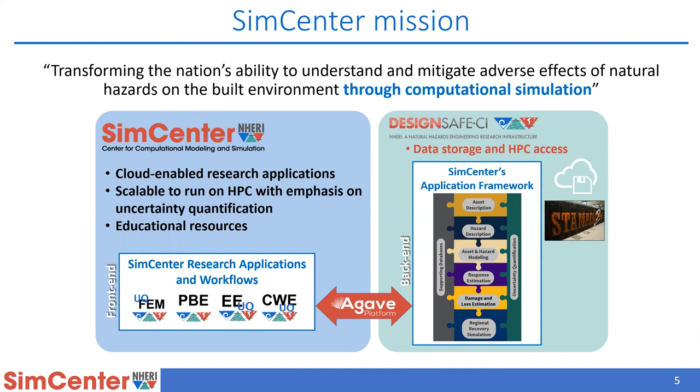So these 4 are our research applications, and one of them is PBE that I am going to talk about today. PBE is really just a facade, a front end that provides you access to this workflow that we built and the potential to run complex simulations on high-performance computing clusters in the cloud. Besides these applications, we have some other tools that we develop, as I will show you later. But the main purpose of our existence is to create these applications and make it easy for the research community to run complex calculations on supercomputers.

These are the three main products that we develop. I call them products, but that doesn't mean that they cost money. These are all free. The application framework, as I mentioned, is the most important thing that we are working on. We have this jigsaw here because we imagine this application framework as a system of interconnected applications that can talk to each other through the interfaces that we develop between them. And this allows you to design various workflows in a very modular fashion.

So if we put together a workflow and there is an application that you don't like, you can create your own jigsaw piece and you plug it in there, say for response estimation. We use OpenSees now, but if you don't like OpenSees, you want to use something else, you can wrap it in your own code and plug it in there. And then you can keep working within a familiar environment and have access to all the other tools that are available in our framework.

And besides these applications, we also pay a lot of attention to the data that supports them and making sure that you can connect to those databases that are available for the research community. And uncertainty quantification is in every step. So this is it in a nutshell. And when we have such an application framework, we can create various workflows.

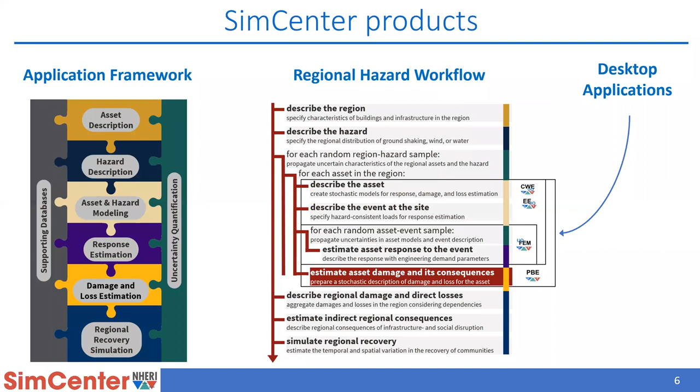And one of them is PBE here, which what it really does is it takes a piece of the workflow out. So you can see that it's kind of this middle piece, and then it makes it much easier for you to access it and use it and get used to it. And then once you get familiar with it, you can probably leave the user interface and the desktop application behind and start using the full workflow. But this is a very nice learning process, and it allows you to get familiar with what we are doing and how these applications and workflows are designed.

So just to give you an example of what applications and what different puzzle pieces can go together, here is an earthquake simulation workflow with 3 different types of fidelity. So in one case, you can think about HAZUS style loss assessment and the corresponding very simple modeling of the structural response. And if you don't like that, you can simply switch this piece and you can have a high fidelity model and a FEMA P58 style, more detailed loss assessment.

Similarly, on the hazard side, you can start with a seismic hazard analysis, but you can also have a physics-based seismic wave propagation calculation, and then you have the ground motions from there. So this one is a probabilistic procedure based on historical data, and this one is more physics-based, based on the understanding of the soil conditions around the site. And we could continue with different other options.

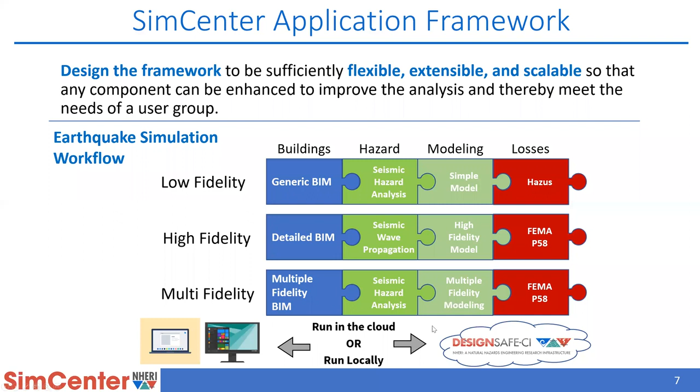So this is how we imagine having multiple choices available for the researchers so that you can put together the workflow that fits your needs and your particular objectives. And whatever you put together, we pay very much attention to make sure that you can run it locally so that you don't necessarily have to share your early results or your first pieces of code or new developments. But then you can also run it in the cloud through DesignSafe without making any changes to your code or your input files. So once it runs locally, it will run on DesignSafe too. And we think this is quite powerful.

Two examples of the workflows that we put together and the potential that is already there are demonstrated by the test beds that we have. We have one test bed for the San Francisco Bay Area. You can see an example here with the expected damage from a magnitude 7 earthquake at the Hayward Fault. And we also have another test bed that we put together last November after the earthquake in Alaska, just to show that this approach and having these tools available to you would allow rapid assessment of the damage and the losses after such an event.

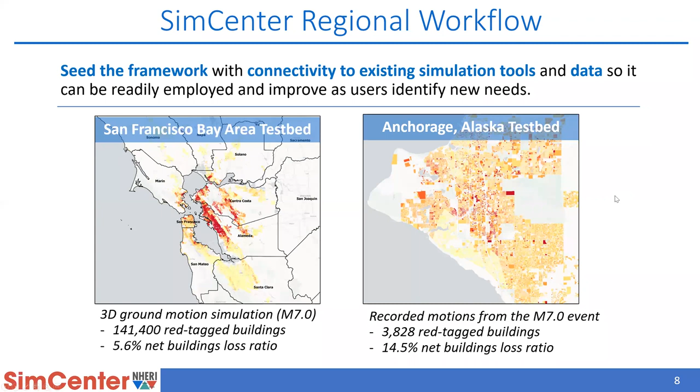And both of these took significantly fewer man-hours to put together than if we had to start from scratch. So if you are interested in earthquake losses in the United States, it's usually quite easy to get the data that is required, building information, for example, and then you can do a similar kind of assessment within a reasonable amount of time.

After the workflows, let's see a little bit about the applications, the other applications besides PBE. So PBE is here. We build research and educational applications as well. So I already talked about the research applications that are basically parts of this larger regional workflow, and then we put a facade in front of that calculation backend so that you can access it easily.

We have the EEUQ, which was presented last week by Frank McKenna. CWE is more about wind-related calculations, and UQFEM is an application that focuses on uncertainty quantification for finite element modeling. And besides these, so these are for research, and we have 4 applications that are more focused on education. So these are usually simpler applications.

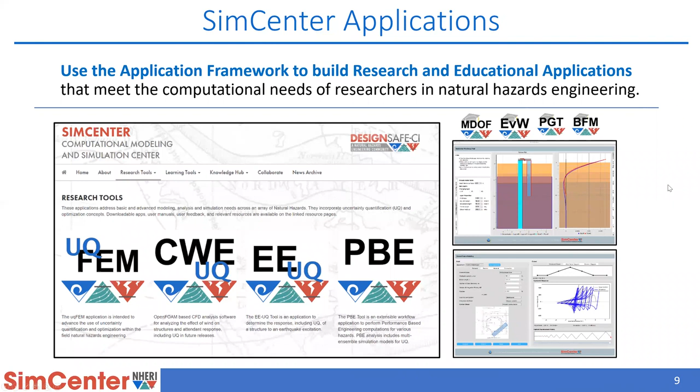They don't use the regional workflow, but they use tools that we identified as interesting or important for students, and we allow them to access those tools and to run some interesting calculations and interesting problems for educational purposes. You can see these applications and you can read more about them at our website. This is a screenshot of our website. You can see the research tools under research tools, and you can see the educational applications under learning tools.

So it's very important to understand that SimCenter very rarely develops applications or tools for a particular purpose. There are exceptions, and I will show some today. But mostly we are searching in the community and trying to identify the tools that are already available. And we just package them, make a jigsaw piece, and then make it available to others so that you all can use the tools that others have already made. And this avoids developing the same thing twice or 3 times as it happened already in the past few decades. So that's enough about SimCenter.

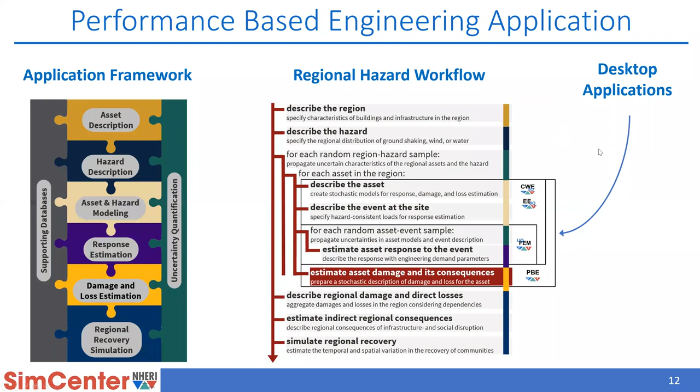But it's important to know that even that workflow uses the same backend for the performance assessment as the PBE application. So if you get familiar with the backend and if you get familiar with the performance assessment in the PBE application, it will be much easier to use our regional workflow later.

So here are a few details about the application. As I mentioned, it's mainly a front end. So it has this front end part, which is really a desktop application. It runs on 3 different platforms. It runs on Macintosh, it runs on Unix and on Windows platforms. And it provides this convenient user interface to this part of the workflow, this script of the workflow.

And you might notice that everything except this red part is actually something you already heard about if you were there last week at the EEUQ webinar, because this is just a response estimation considering uncertainty in the event and uncertainty about the characteristics of the building. So that is covered by EEUQ. And then what PBE does is it extends the EEUQ backend so that you can assess the losses given the response of the building to a seismic event.

And the desktop application part, so what you will see in today's webinar, is a front end that prepares an input file for this backend that does the calculation. Now, one consequence of this is that once you are very familiar with how that input file looks, you will be able to create that input file yourself using your own, I don't know, MATLAB code or Python code or whatever you use for your own research.

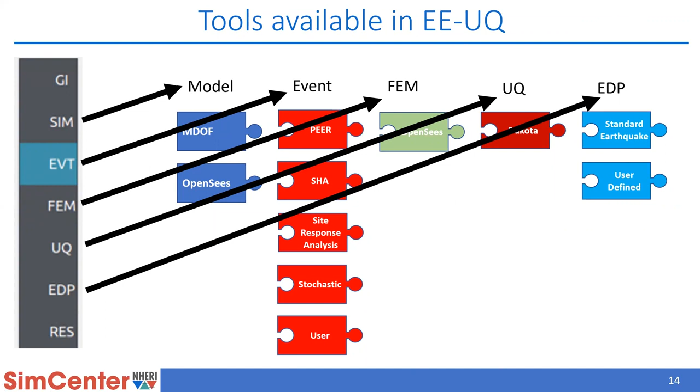Now, I will have a slide that shows something that Frank showed last week for the EEUQ. So as you can see, all of these options are available in EEUQ for the different puzzle pieces in the workflow. So you have different ways to model the structure, many different options to model the seismic event. We have OpenSees for finite element modeling, and we use Dakota for uncertainty quantification. And then EEUQ provides EDP values in the end. And what we do with the PBE tool is that we pick up from here, and then we use pelicun to calculate the decision variables that describe the losses, and the damage measures that describe the damage in the building.

So one more thing before we start the demo. I really recommend you to read the manual, because it will help you install the environment that is required to run the application. It's not very challenging, but if you don't read the manual, I think you will have a hard time. So it walks you through it, and then it will explain the usage of the tool, every single panel, every single field that you can use to define your problem. And it also has some troubleshooting parts where we try to identify the typical errors and help you to solve those problems.

And if you cannot find a solution for your problem and you are experiencing errors, that could very well be because there are bugs in the software. It would be a lie if I told you that it's a perfect tool. Of course, we have certain issues, and we would be very happy if you told us if you experience problems, because that helps us correct those problems and move forward. So please give us feedback if you experience trouble.

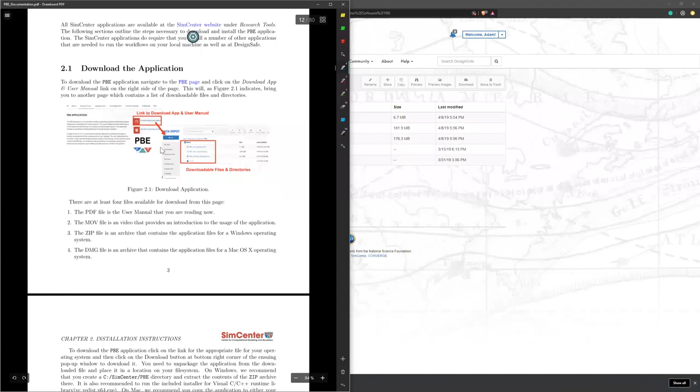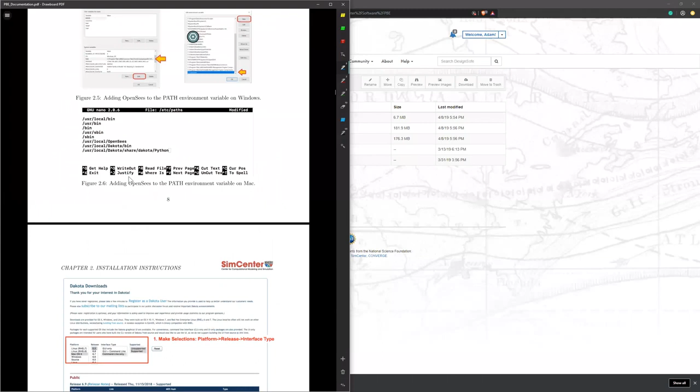We also give you suggestions on how to test your installations. So everything you need to install, you can test, and if the tests don't work, then we can help you to find the problem. So you run these tests, and then you have the application ready, and it should work. And then we also explain how you can test the application itself. So you install the environment, you have Dakota, you have OpenSees, you have all that stuff. And then how can you make sure that you will be able to do a calculation with this PBE application?

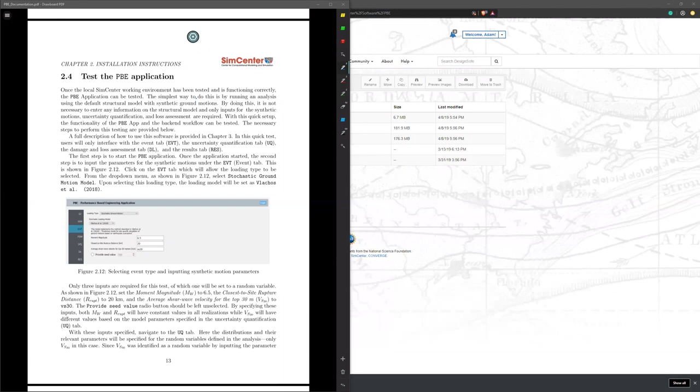And I will start with running that test here, because it's just very quick, and it will allow me to walk you through the interface, and then we will gradually advance to more complex examples from there. So I have just started this application. This is how it will look for you. And seeing the interface doesn't mean that you will be able to do a proper calculation with it. So don't be fooled by that, because as I mentioned, this is just a facade.

It will create an input file. It will give it to the workflow backend. And then if there is a problem with one of the tools that we use, say you don't install OpenSees correctly, then it will only realize that when it tries to run the finite element analysis, right? So seeing this doesn't mean that everything is going to be okay.

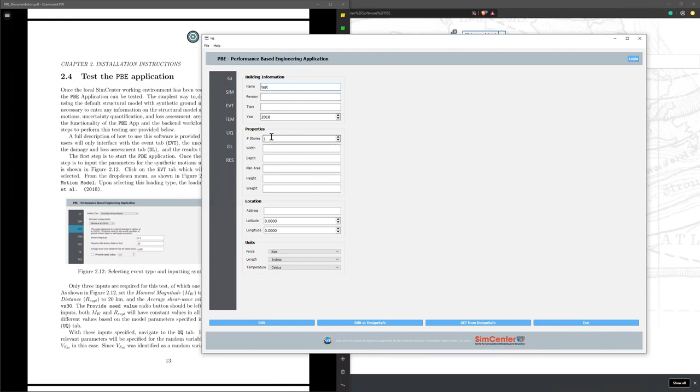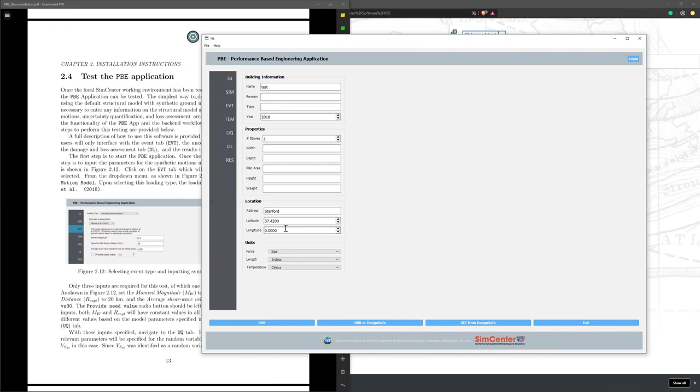Now, as we explain here, you don't need to set a lot of things to put together an analysis really quickly. As you will see, we only need to change a few fields, and then we will be able to run a calculation. So what we do here is we give it a name. This is not necessary, but it's good practice. And then we give it a location. I will use Stanford. So pay attention to the units here. We will keep the US units for now.

And then in the second tab, we could set up a model. We could set up various kinds of models, but we will leave it as it is, and this will give us a nice single degree of freedom system. So we don't need to touch that. And then for the event, instead of loading a ground motion or doing seismic hazard assessment, we just use a stochastic ground motion tool that will generate a time history for us. Frank also explained this last week, so I'm using the same example he used, where it's a 6.5 magnitude event, 20 kilometers from the site, and the VS30, so the soil stiffness, is going to be a random parameter in our calculation.

So this is it. We have an event, and then here we could set some parameters for the analysis, but we are not going to do that now. And we use Latin hypercube sampling. So this is the uncertainty quantification tab. Latin hypercube sampling, 10 samples. And as you can see, it already picked up our random parameter VS30. I'm also following Frank here from last week, so I'm adding 350 for the mean and 25 for the standard deviation of the VS30 normal distribution. It doesn't really matter because we are just running a test now.

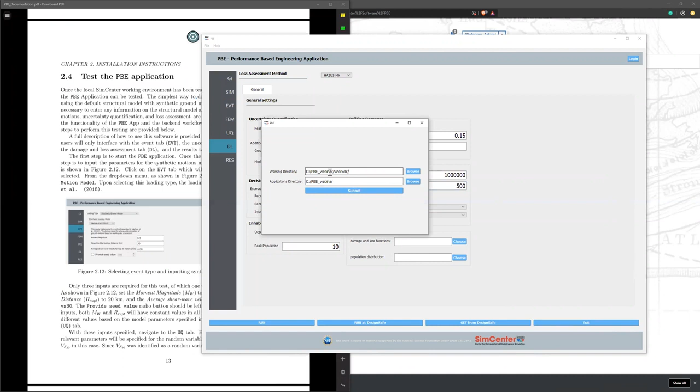So this one is the folder where you put PBE. I just put it in the PBE webinar now. And this one is in your documents folder on your computer. And I will replace this now. You shouldn't do that. I will replace it because I want to show you some of the results, and I want to make sure that they are going to be available. So if you specify a workdir here, it will put all the temporary files in that directory. So I just put it in the same folder where my PBE application is.

And then you click submit, and you can see that it's running the workflow up here. You will always get these messages to know what is happening. And now it's running the damage and loss calculations. And if all goes well, then you see the results. The results are at this RES tab, and there are two tabs within there. The data values, which plots you some of the data. I will go into more details in a second.

And the summary, let me pull this a little bit, that provides you some statistics. So it gives you the mean, the standard deviation, and then a couple of percentiles, so that you have a general understanding of the marginal distributions of the different decision variables and some of the inputs here. So these are, for example, the time of the event. So not all of these things are decision variables. But for HAZUS, you see you have 4 different severities of injury. You have a reconstruction time, a reconstruction cost, and the number of inhabitants. And then you see how they are distributed in this particular meaningless example, because this was just a test, right?

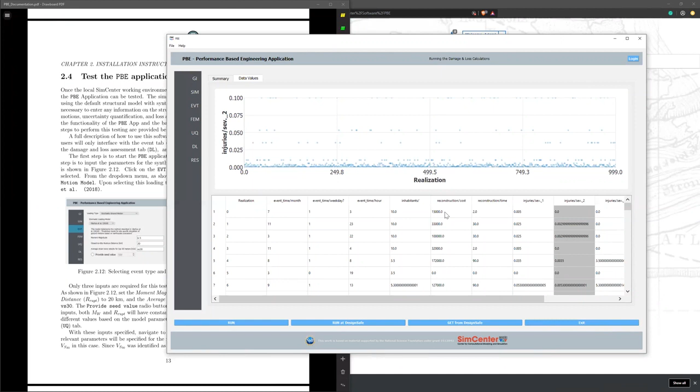For the visualized part, we have a spreadsheet here. Each row is a realization. So you see we have, in this case, 1,000 realizations, and it shows each of those decision variables and inputs. And you can plot them against each other. So you can see the joint distribution. For example, we can plot, let's say, reconstruction cost and reconstruction time.

Just to give you an example, there is this really neat way you can control what you plot by clicking on a column with the left or the right mouse button. So if you click on, let's say, injuries, if I click with the left, injuries are put on the y-axis. If I click with the right, the injuries are put on the x-axis. So you can always plot two things against each other by clicking with either mouse button on them.

Now, another thing you can do is you can click on the same column with the 2 mouse buttons, and then it depends on which one was the last. So if you click with the right mouse button last, then you get a cumulative density function. If you click with the left, then you get a probability density function. So this one gives you a general idea of the marginal distribution of this particular decision variable.

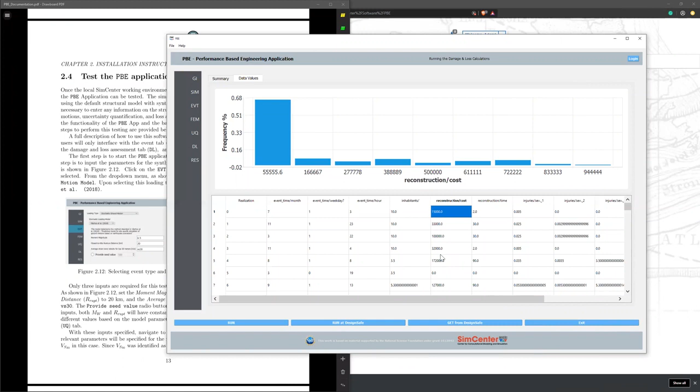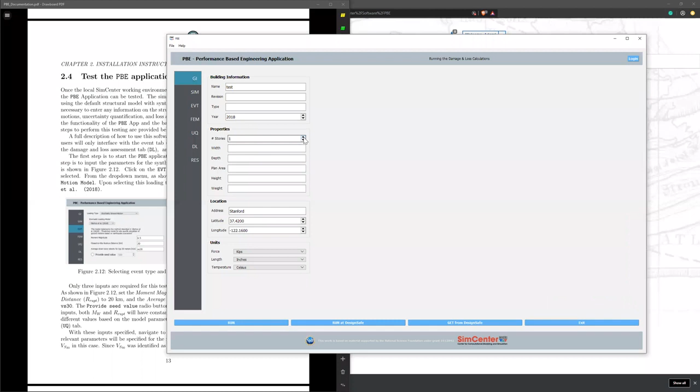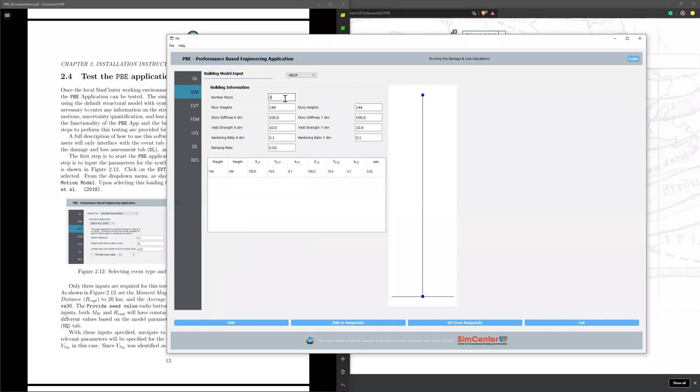All right, so this was interesting to see that the application actually works. But now let's put something together that is more meaningful. So we go back to the beginning and we say that this is going to be a 3-story building. So here we add 2 more stories. This is important for the loss assessment engine, so that it knows how many stories it needs to look at. And then we go to the simulation and increase the number of floors to 3. And as you can see, this is updated. So now we have a multi-degree of freedom system.

And we don't want to simulate a 3-dimensional response. So we will increase the stiffness in this direction quite a bit. And we will add the hardening ratio of 1.0. So that means it's elastic, regardless of what the yield strength is. And I will update this with a couple of meaningful parameters, just to get some response that is interesting in the end. The story stiffness and the yield strength, and that's the last thing I need to change, I believe.

And you can see that if you change these values, it will update all of the stories. So of course you could go and change it story by story. I just want to be quick this time. But if you do that, you can save your work. So it's not like you make a 20-story building and you do all these changes, and then the moment you close the application, you lose all that data. So whenever you feel like you already put a lot of inputs here and you would be sorry if they were lost, you just save what you did in a file and you will be able to load all those later.

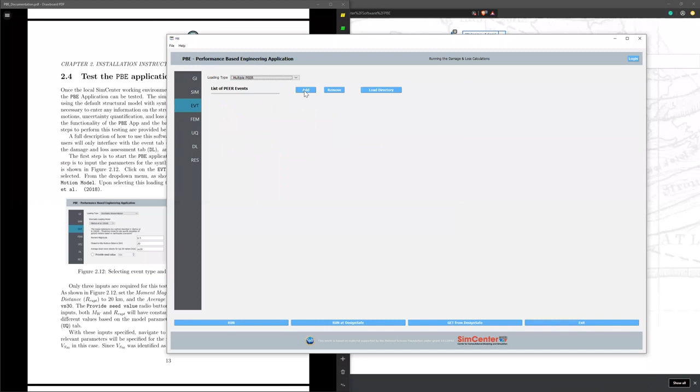So we have stochastic ground motion now, but we would like to change this just so that you see something else. We use a multiple PEER option, which means that you can use ground motions defined in a PEER format. I will add 3 of them now. And I prepared these earlier.

So you go to, oh no, not here, that's coming. So we have events, and then I prepared a couple of ground motions that represent a 10% in 50-year event at Stanford, and I will load 3 of them now. And as you can see, this can be quite cumbersome if you want to load, say, 40 ground motions. So in the next example, I will show you how to do this quicker if you have a large number of ground motions. But for these 3, I think it's doable.

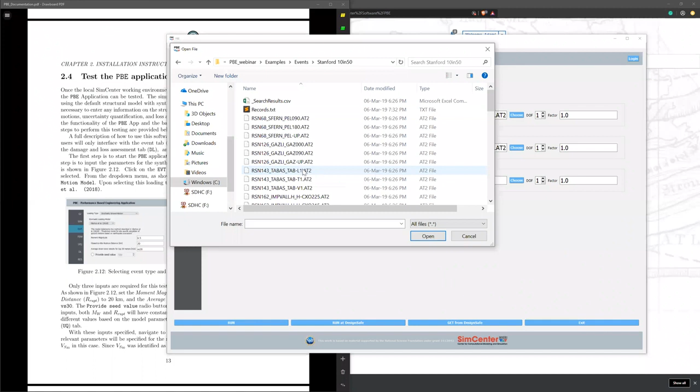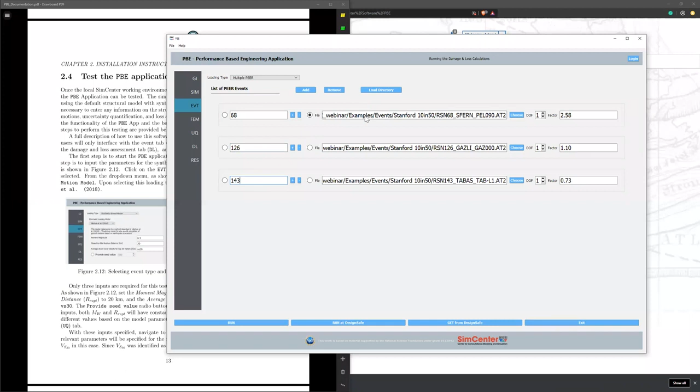So this just shows you how it works when you load the ground motions one by one. So we have 3 of them, and then I will specify the scale factors here, again by hand, but we have a way to do this automatically, as you will see in the next example. And yep, we need to give some names to them. Usually I just use their IDs, so 68, 126, and 143.

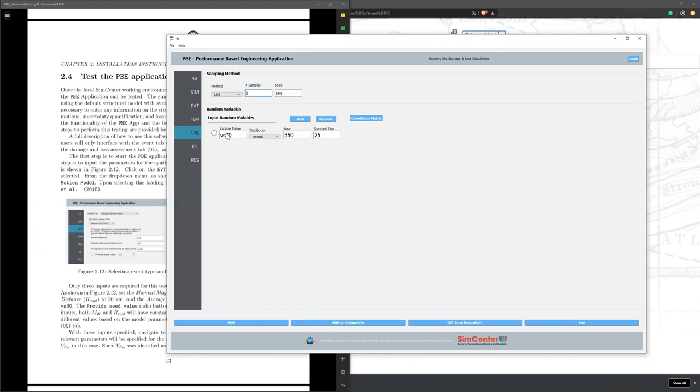Okay, so we have 3 ground motions, and we want to run just regular OpenSees analysis, but we don't need 10 samples, 3 samples is enough. This will make it a bit faster. And we no longer use the stochastic ground motion option, so we can remove this random variable.

Okay, when it comes to the damage and loss, now we can say that we want to add some uncertainty here. Let me go into the details now for every field here. So for HAZUS, we give you the option to add uncertainty to the engineering demand parameters that come from a finite element analysis.

One thing that you need to know about this HAZUS option is that this assumes that you have engineering demand parameters available from an analysis, and it uses the fragility and the loss curves from HAZUS. It does not use the curves that associate intensity measures with damage and losses. So it doesn't use the vulnerability functions, it uses the fragility functions. This is, I think, an important distinction. So it allows you to do a more sophisticated finite element analysis and still use the assembly-based fragility options in HAZUS.

Now, given that we are only using 3 ground motions, I think the 0.2 is still quite bold here for uncertainty, but anyway, we just put some values here. These are added to the logarithmic standard deviation of the engineering demand parameters, so it adds uncertainty to the results. We will simulate 1,000 realizations. Here you could choose between different types of decision variables. If you are not interested in injuries, for example, you could turn it off, and then that will make the calculations a little faster.

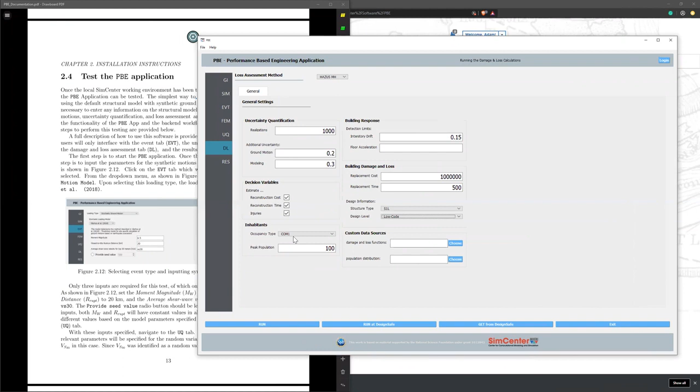And here, this allows you to override the default fragility functions. So HAZUS provides some fragilities, as I mentioned, but if you have your own, you can format them according to the JSON formatting that we defined for HAZUS, and I am very happy to discuss that if you are interested in such things, it's not difficult. And then you can provide that here and override the HAZUS ones and make sure that the calculations are performed according to your fragilities. This is also interesting if you have a particular type of occupancy or structure that is not included in HAZUS and you want to do some calculations for that.

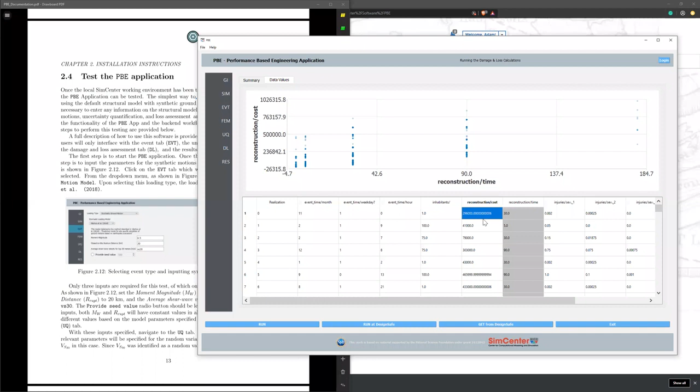Okay, so now we can run the calculation. Again, we can see that the simulation is running, the damage and loss calculations are running, and hopefully we see the results. There you go. So now we have results for a 3-story structure. Reconstruction cost is usually more interesting. And you can see, again, the cumulative distribution function or the PDF. You can plot reconstruction time versus cost, so you can have a general understanding of the data. And again, the summary results are available.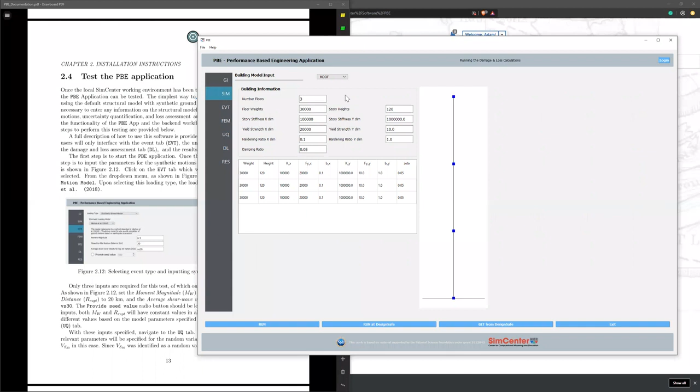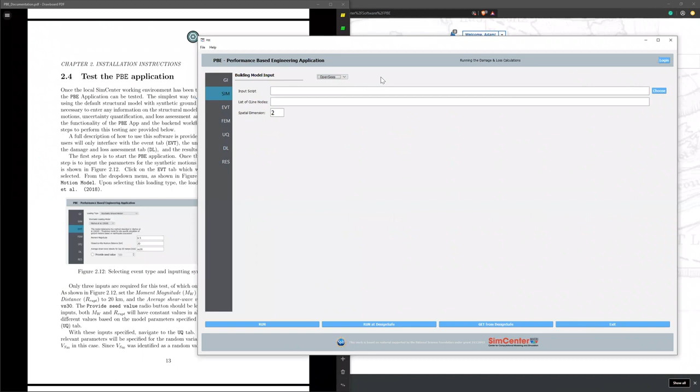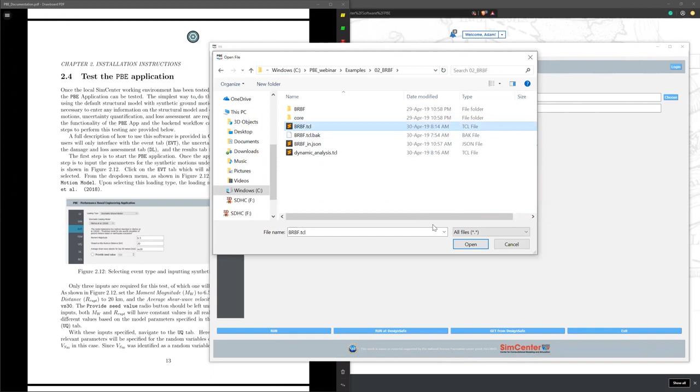Now let me move on to one more example, and that will be the last one, where we are not using this MDOF, but we are using a finite element model that was previously assembled by me, and it could be something that is assembled by you. Many of you probably use OpenSees already, and you have your own models that might be much more sophisticated than an MDOF. And for this case, I will use a BRB, so a buckling restrained braced frame that I developed earlier, and I will show you how this exactly works.

So just really quickly. This is the file that I loaded here. So you see this is the BRBF TCL file. And this code, as you can see, references other TCL files, and it doesn't do much. It builds the model. It doesn't do the analysis. So this is a model file. I will open the model builder for you just to see that this is a pretty complex model. I will just scroll into it just so that you see that there's a lot of things going on here.

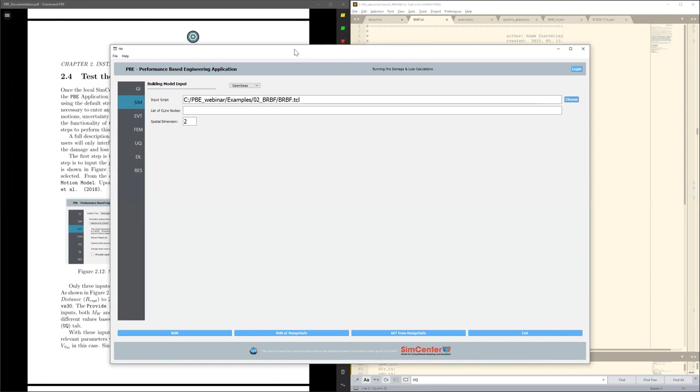So this demonstrates that you can load anything here that is defined in OpenSees and that will run properly in OpenSees. So if you have your own model, but you have not developed a loss assessment tool that could estimate the damage and the losses to that particular building that you modeled, you can use our tool to load your model, do the analysis that you have been doing, and then extend it with a loss assessment step.

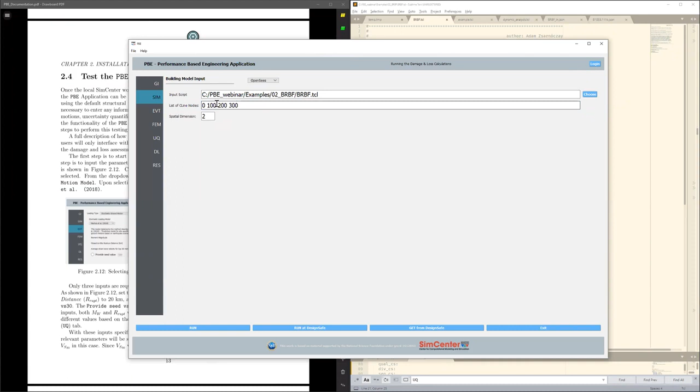One thing that you need to specify, and I think Frank also talked about this last week, is the column line. So this is a 3-story BRBF, so we have 4 points here because we need everything from the ground all the way to the top of the building. And because now we are going to use FEMA P58, we have to go here and specify a plan area. And I'm sorry, but I'm from Europe, so we are going to use standard units now. So we are using meters. This means it's 500 square meters. That's the plan area. And it's still a 3-story building.

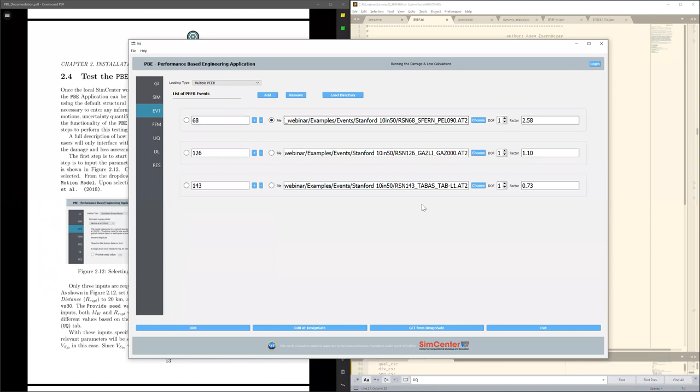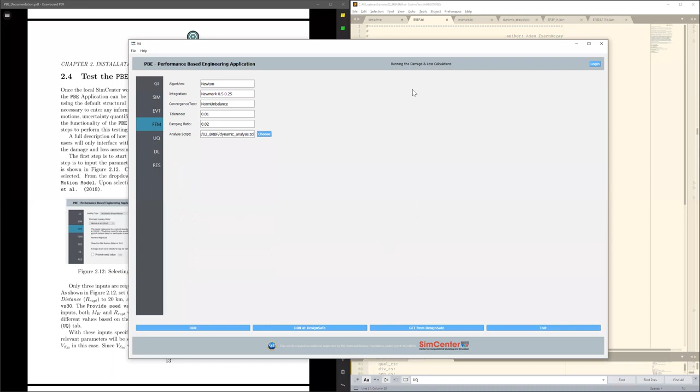And although this was designed for Istanbul, we will put it in Stanford for now. We use the same 3 ground motions. I'm not going to change that. But for the analysis, these settings will make it very hard for the model to converge. So this again shows you something that I think is very nice. We can override those.

So if you have your own dynamic analysis routine, and again, let me show you what that means. So I'm having a function. This is what I loaded, this TCL file. And I take the number of points and the DT value from the PBE backend. And I define the function to do the dynamic analysis here. It's an external function, but again, just to show you what that means, here is the function. So it's a fairly complex function that makes sure that we find convergence.

Okay, so I loaded that, it will run in the background and override this one. For the uncertainty quantification, I use only 3 samples because these are more complex models and I don't want you to wait too long for them to run. And then for the damage and loss, we will go and use FEMA P58.

Now, some of the general settings are familiar now that we talked about HAZUS a little bit. So you see that there is uncertainty quantification, same things. You can choose between decision variables. You can choose the type of occupancy and specify the number of inhabitants. For the building response, besides the detection limits, you can specify a yield drift ratio. This is used for assessing the residual interstory drift.

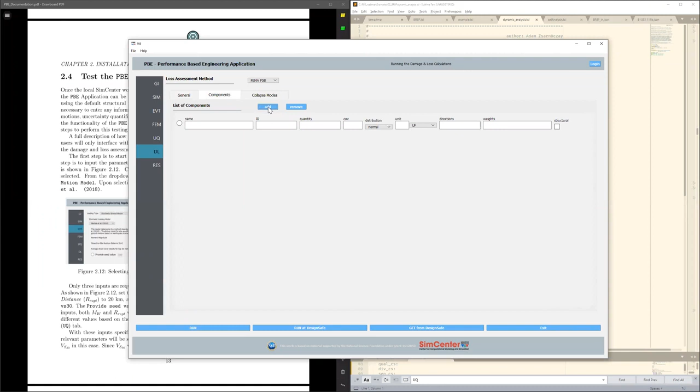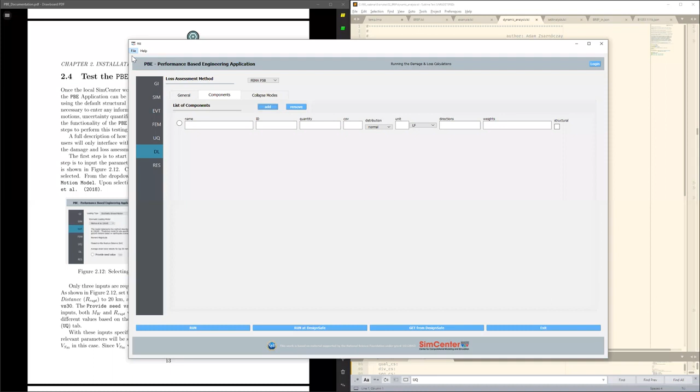I will load an input file in a second, and then it will populate all these fields so that we don't take too much time there. But let's see the 2 other tabs before we move on. So there is a components tab, because this was only general settings. The components tab is where you specify the different components of the building. Now, by clicking the add button, you can add the new component, and you see that there are a couple of different pieces of information that you will need to put in here.

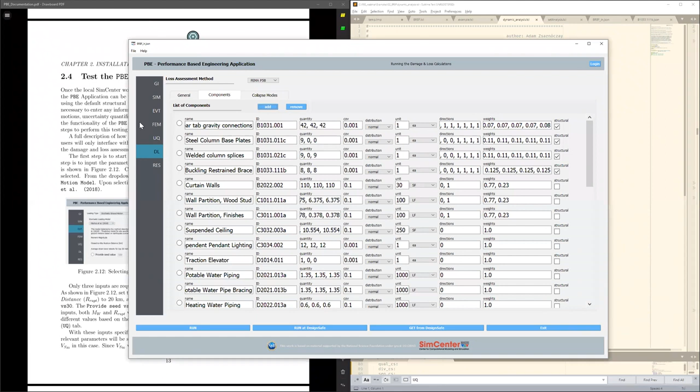Let me load the input file, and then we will see how this looks like. So this is how you would load a file that you saved before. Yeah, so this is how it looks like. Let me enlarge this a bit. Okay, so you see that we have different components for the building. This is the ID that is given to them in FEMA P58. These are the quantities on each floor. So the quantities are expressed in the unit that is provided or specified in FEMA P58. So this means we have 42 bolted shear tab connections on each of the 3 floors.

This allows us to give some coefficient of variation. So if we want to have uncertainty in these quantities, it is possible with this distribution. And then these directions allow us to specify how many groups we want to distribute these quantities to, and which direction each group corresponds to. So which EDP will decide the damage to this group.

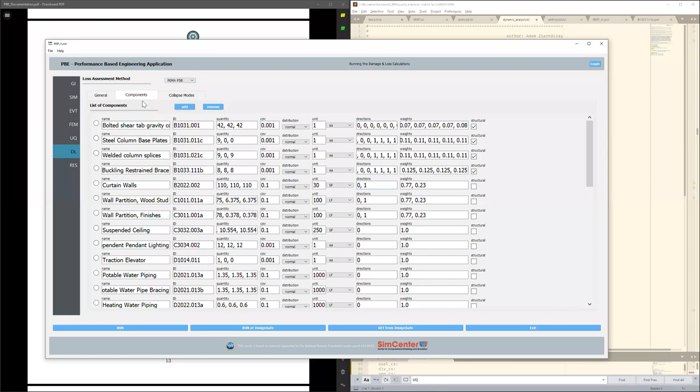Now, there are a lot of directions here because I wanted to be very granular with these quantities, but if you look at, for example, this one, we have curtain walls, and I only have a 0 and a 1. So that means half of them, or 77% to be exact, because the weights describe that. So 77% will be in direction 0, and 23% will be in direction 1, and that's it. And you can see that you can specify if it's a structural component or a non-structural component. All right, so that's about the components.

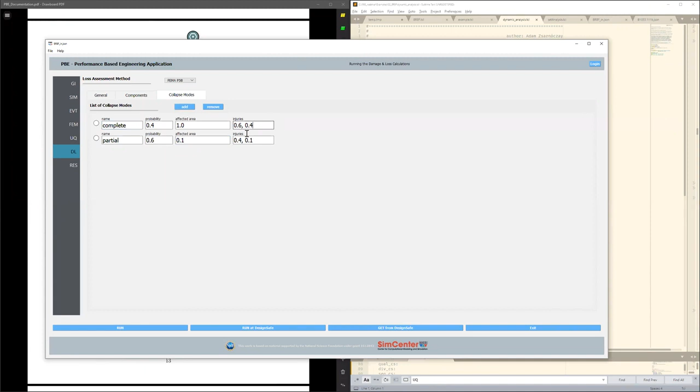And then collapse modes, that's the final thing. We have complete collapse and partial collapse here with a probability. Of course, this has to be collectively exhaustive and mutually exclusive. And then we have an affected area. This means what proportion of the people in the building would die or get injured if the building collapses with a complete collapse, and the same thing for partial collapse. And this describes how many of them get injured and how many of them die. All right, so you could add a lot of additional collapse modes if you wanted to.

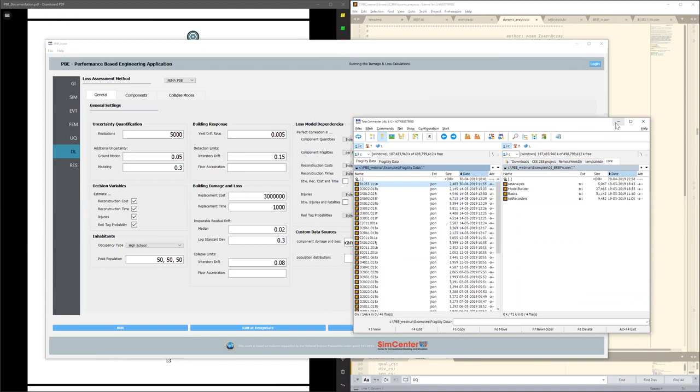And here you can see that we populated this with the fragility data folder, just to give you an idea how that looks. So I have a folder here, probably you can see it now. So we are in this fragility data folder that I specified in the custom data sources. And I have these JSON files, and each JSON file describes one component's fragility and consequence functions. These are JSON formats that we defined so that they can support both the HAZUS style fragility calculation and the

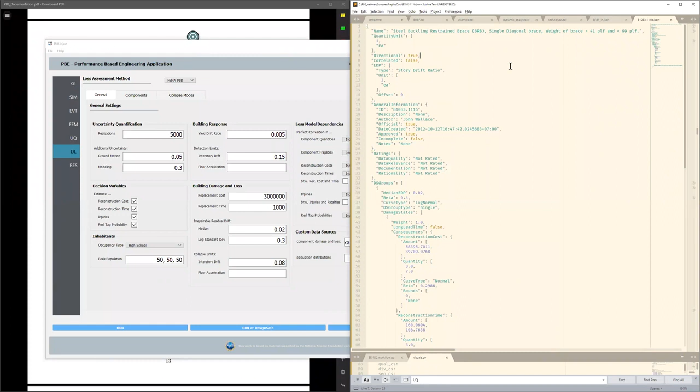FEMA P58 style calculation. And just to give you an example of how one of those looks, here is one for the buckling restrained brace. You can see that it is quite human readable, and it contains the same data that is available in PACT or SP3 or FEMA P58, because everybody uses the same things. All right, so now we have everything defined. Let me just make sure that I did not miss any of the important details.

Okay, so let's run this locally. And I see that I only have 4 minutes until the hour. I'm sorry about that. If this runs, the last thing I will show you, and then I will open this up for questions, is that the same thing can be run with minimal effort through DesignSafe.

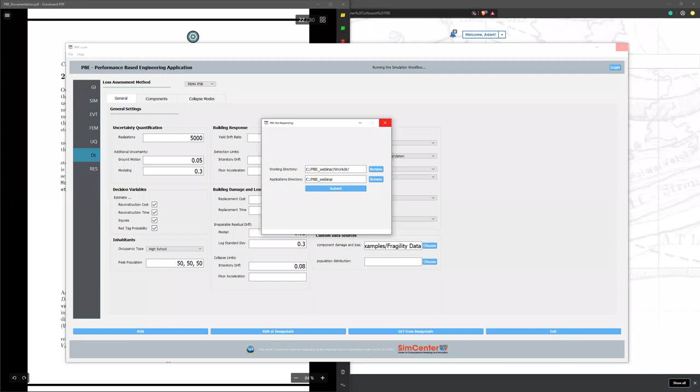And what we will do is I will start a calculation using 20 ground motions, which would take too much time for the webinar, but it will run in the background while we are doing the questions and answers session. And then I will show you how to grab them at the very end from DesignSafe and show the results there. So you see that it's still running the simulation. It's only 3 ground motions, but it takes more time to run such a nonlinear analysis for a real structure that is not just an MDOF stick model.

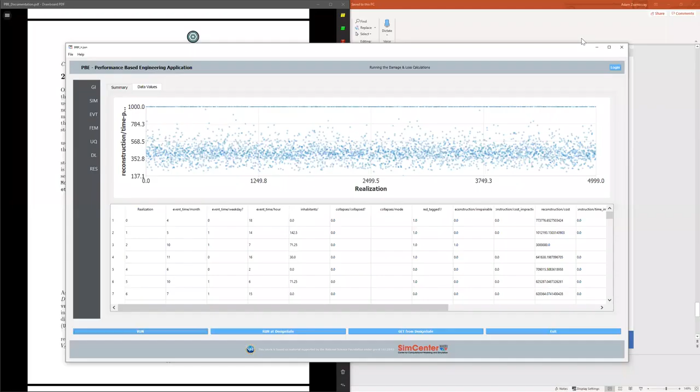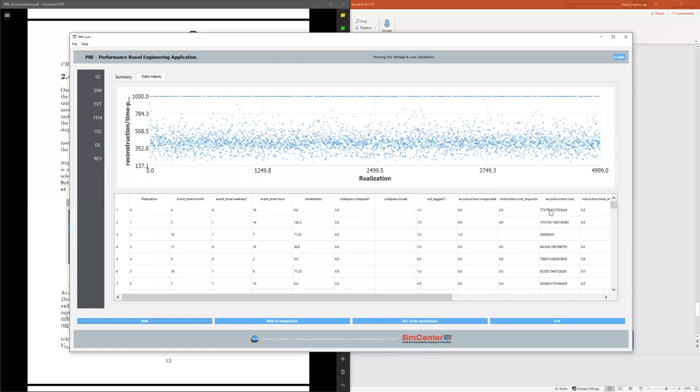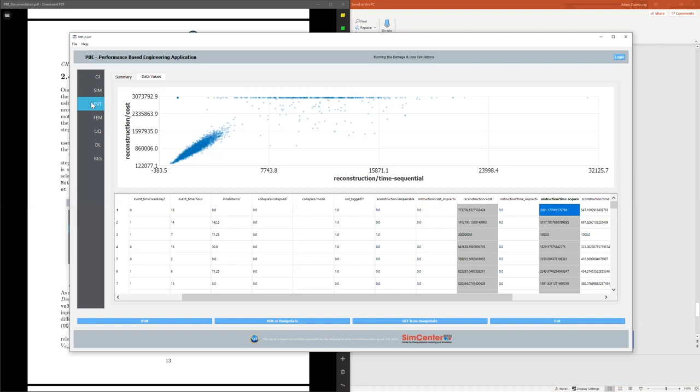Yes, so the calculation finished. So you see that now we have results for a 3-story buckling restrained braced frame that was designed outside of the PBE application, and the model was created outside, but it ran properly for 3 ground motions. And again, we see the reconstruction cost. And we can make this joint distribution quite nicely, right? So it's much more interesting than HAZUS because it has more granularity when you run analysis with FEMA P58.

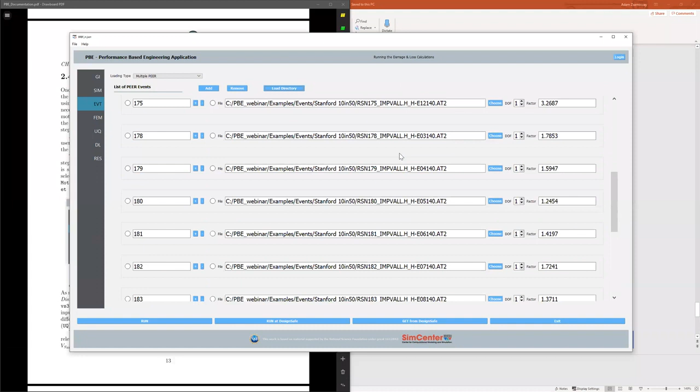Now, in the interest of time, I will only make one change here. I will load a directory. So you'll see we have 3 ground motions. If you have all the ground motions in the same directory collected, so you see that here in the events, I have this 10 in 50, which includes 20 ground motions and the special file that contains the scale factors for the ground motions. So if you select that, you see that it's populated with the 20 motions automatically. All of these, you might feel that I don't give you every piece of detail.

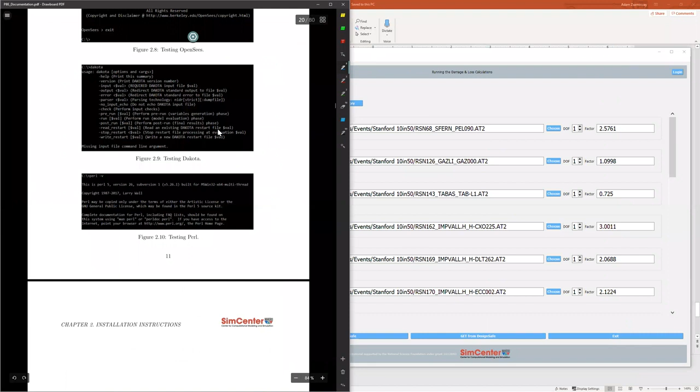The reason is that everything is explained in the manual, or it should be. So if it isn't, then tell us, and then I will append the necessary parts, but everything should be explained in the manual. So how to load these ground motions and how that works. So now we have 20 ground motions.

We set the samples to 20, and instead of waiting 10 minutes for that, what we will do, keeping everything the same, is that we will run it at DesignSafe. For that, you need to log into DesignSafe, which is quite easy once you have an account there. And then you give it a name. This is PBE webinar. And you see that we will get 20 processes running.

One node is enough because each node has multiple processors. So this will mean that 20 of them will run in parallel. And usually you don't need that much time. Try to be very careful setting this max runtime because that decides how much you have to wait before your job actually runs. So if you know that it will run in 10 minutes, then don't ask for more than 10 minutes. And you don't need to modify anything below this. So all you need to do is submit.

And you should see up here that it's creating the package to send to DesignSafe, which is basically the input file, and then submits it and runs in the background. So you don't need to wait for it in front of the computer. You can close it once this disappears and come back later and get the results from DesignSafe at that point. You see, it's already there. The job started. This is independent from your computer.

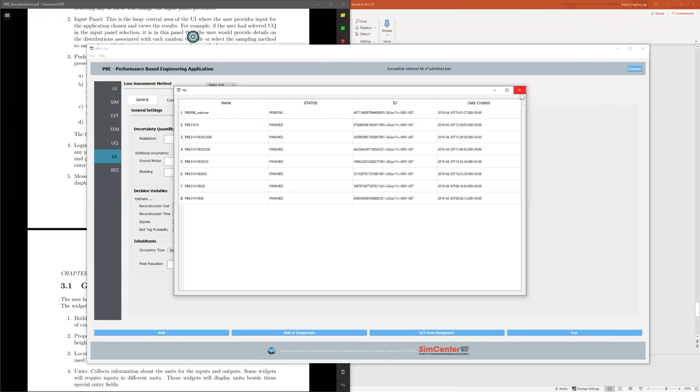So I think I will stop here. Our job is running. If I click on Get From DesignSafe, you can see that it's pending, which means it's in the queue. It's the PBE webinar. And once it's run, we will be able to retrieve it and see the results. Now with 20 ground motions on a 3-story buckling restrained braced frame. Okay, so I stop here.

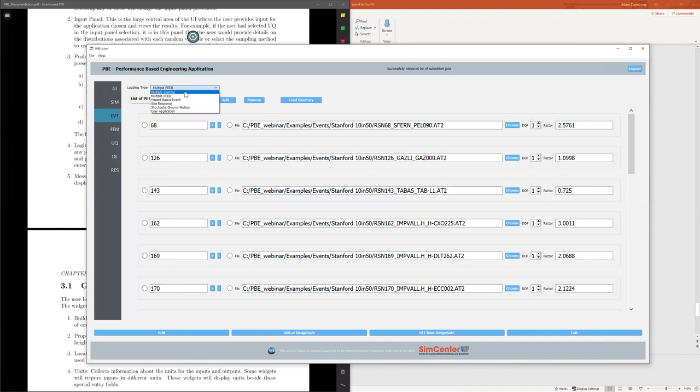If you want to use seismic intensity measures as the inputs for fragilities, then you need to do kind of a hack by making the intensity measures EDPs, and then those EDPs can be fed to Pelicun, and then it will basically use fragility curves as if they were vulnerability functions. So that is possible. If you are asking about intensity measures for the event, then there, when you use ground motions that are previously selected, of course, you can use any kind of intensity measures to do that. So that's not that interesting.

But when you use a hazard-based event, for example, here we come up with a response spectrum and then do the record selection based on the spectrum. So if it's spectral accelerations that you're after, I think we can say that those are supported. If you are interested in more exotic intensity measures, such as SA average, for example, or duration, those are not yet supported, but we are very interested in those, and we would like to get them in as soon as possible if there is an interest from the research community. I think that's what I can say about that.

Similarly, I can say a similar thing for the losses. If there's an interest from a lot of people to have vulnerability functions available, so not only fragility, so go from intensity measures straight to damage and losses, I'm very happy to change the interface and make it available here. And then you don't need to do any kind of hacking in the future.

Okay. And another question, do you have REDi functions in the model, impeding factors and repair? No. Not yet. Okay. This is a feature that we planned for the end of the summer. And I think I can say that we are working with the folks at Arup to make sure that we implement it properly. I'm not sure it's going to be available by the end of the summer, but I think both parties are interested in this collaboration. So we will see when it gets done.